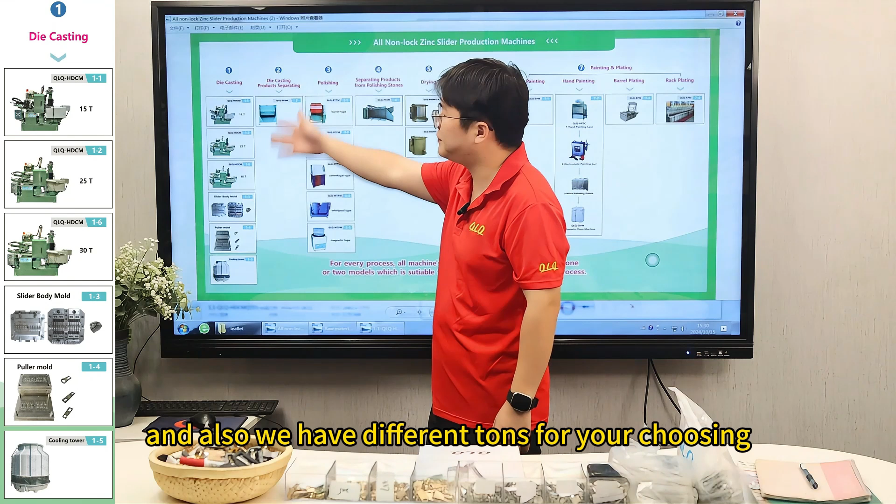The first one is die casting. For die casting, we need to make the slider body and the puller. We also have different tonnages for your choosing, 25, 30, or bigger tonnages. We can also provide you slider body molds and puller molds.

After die casting, we need to separate the products and the frame.

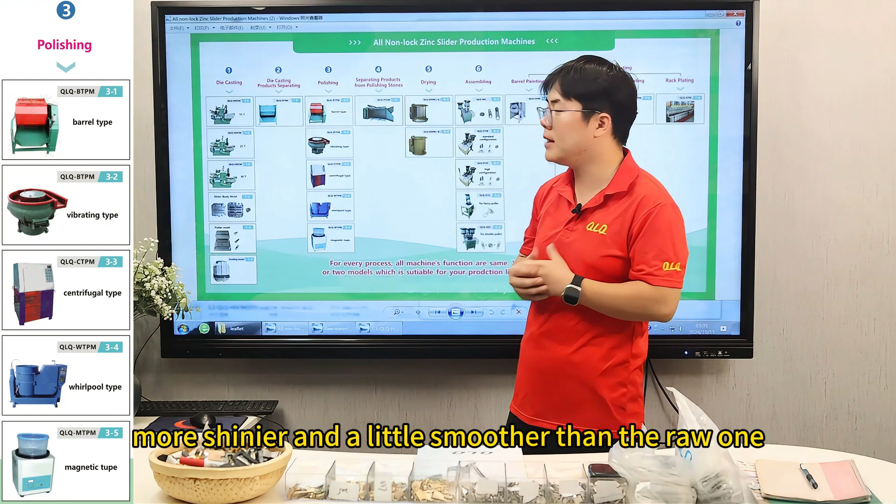After separating, we need to do the polishing. Polishing makes it a little shinier and smoother than the raw one. For the polishing process, we also have many different models for your choosing, normally the barrel type, the vibrating type, and also some high-speed type. It depends on your polishing requirements.

After polishing, we need to separate the products and the polishing stones, because in the polishing process we add polishing stones like this one, in different shapes, into the polishing machine.

After separating the polishing stones, we need to dry the products, removing the water from the surface.

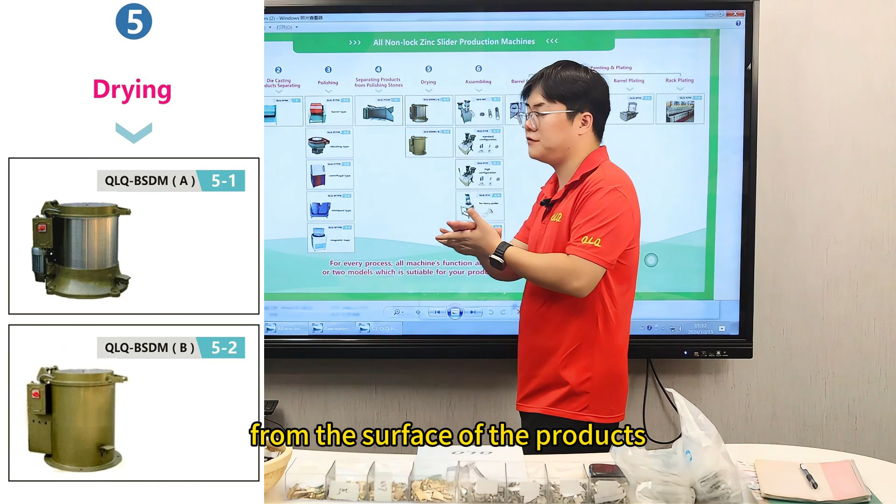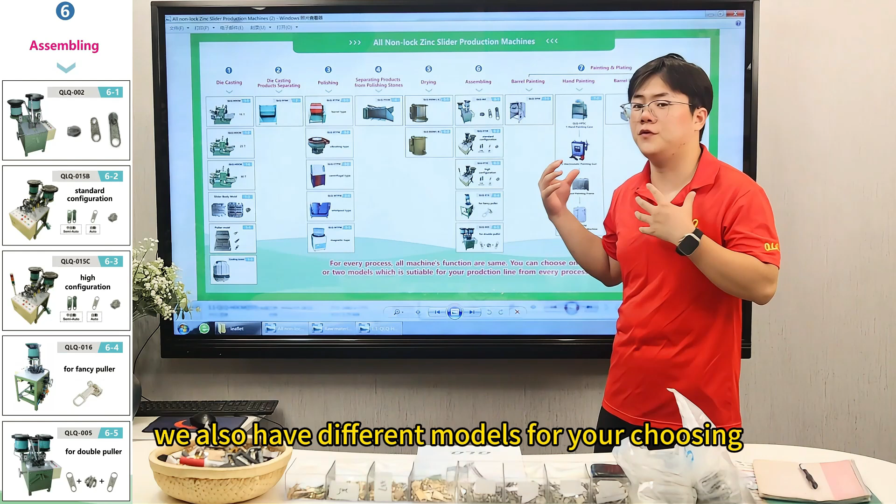After drying, we need to assemble the slider body and the puller. For the assembling process, we also have different models for choosing, some for the standard puller and some for fancy pullers.

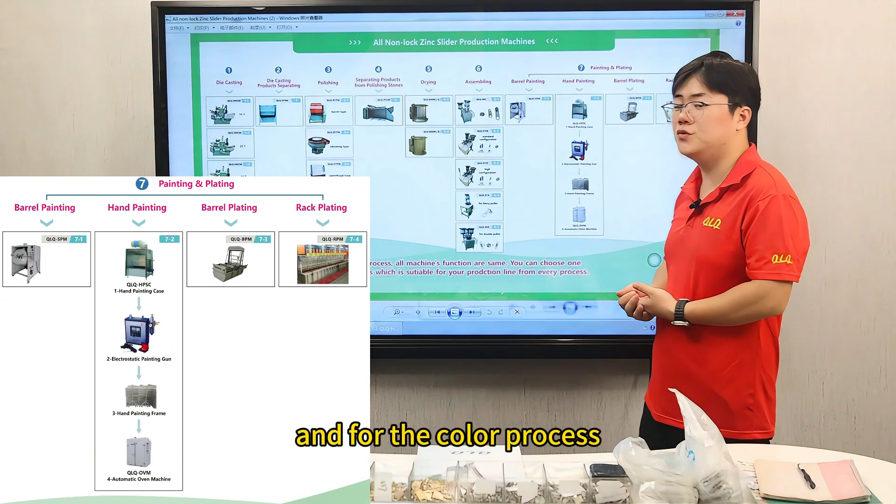After assembling, we need to make the color. For the color processing, we have 2 solutions: painting and plating. For painting, we have barrel painting and hand painting. For plating, we also have barrel plating and rack plating.

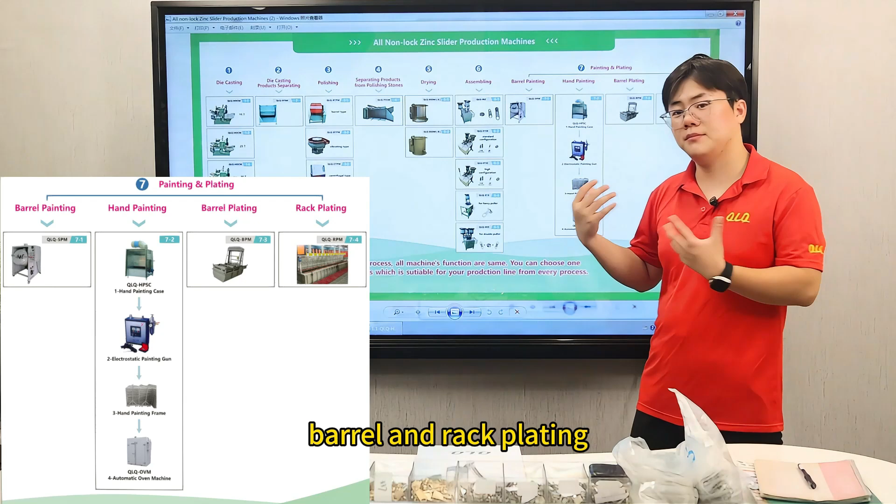So this is the whole process of how we can make the non-lock slider.

Beside these processes, let's see which materials we need. This is the raw material for non-lock slider production. The first one is zinc for the die casting process. Second are the various polishing stones used for the polishing process. Different ones give us different results.

Besides these two, we also need paint, thinner, and chemicals. The chemicals are mainly used for the painting process and plating process.

In addition to the raw materials, we also have videos of each machine. As you can see, this is our 25-ton die casting machine.

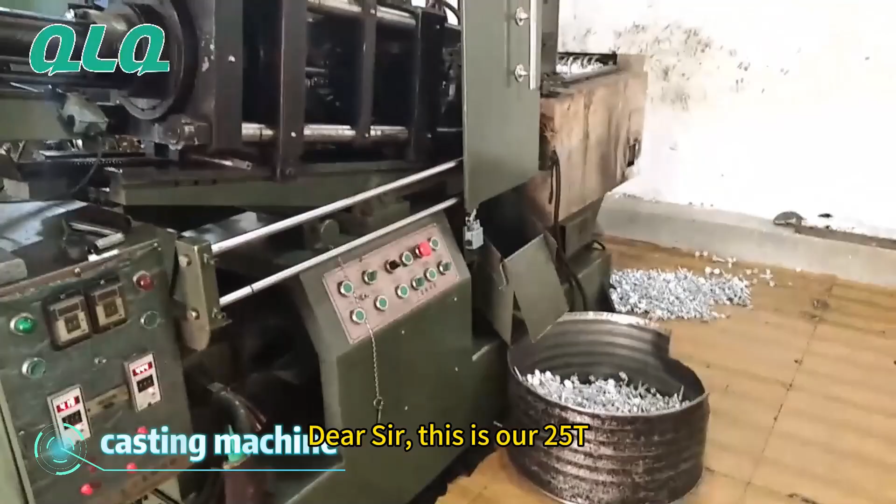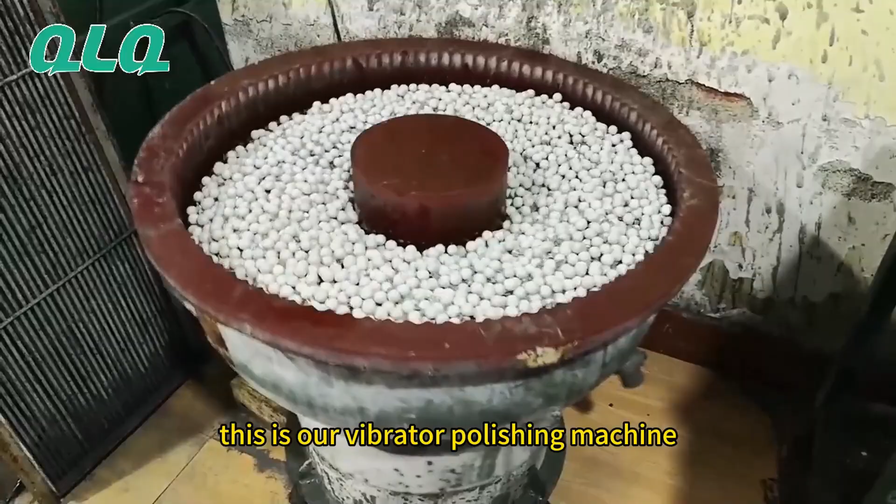Hi dear customers, this is our vibrator polishing machine.

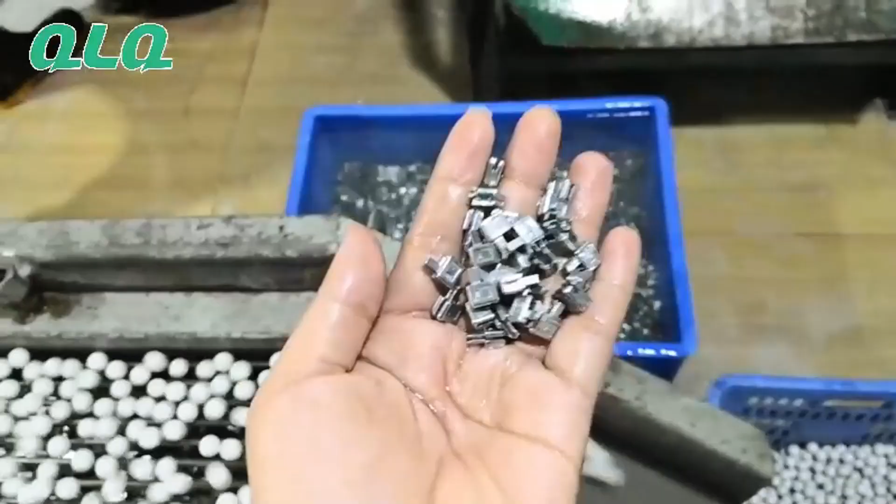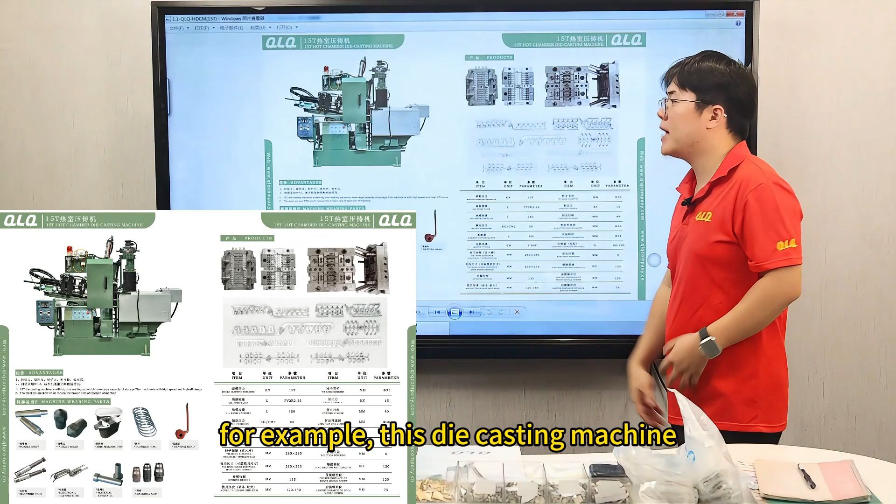Besides the videos, we also have leaflets for each machine. For example, this die casting machine leaflet includes some basic information and spare parts used for these machines, as well as our advantages, so you can have a better understanding of our machines.

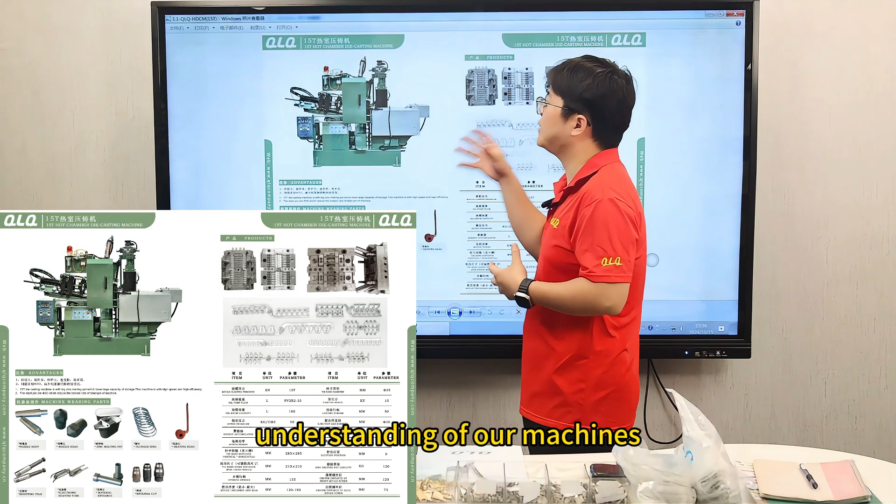So this is a brief introduction of how we can make the non-lock slider.